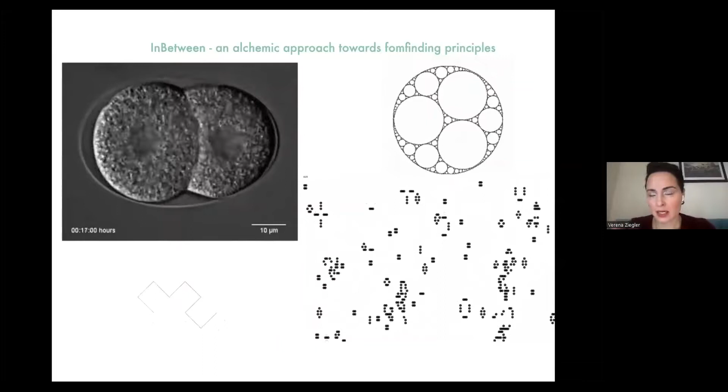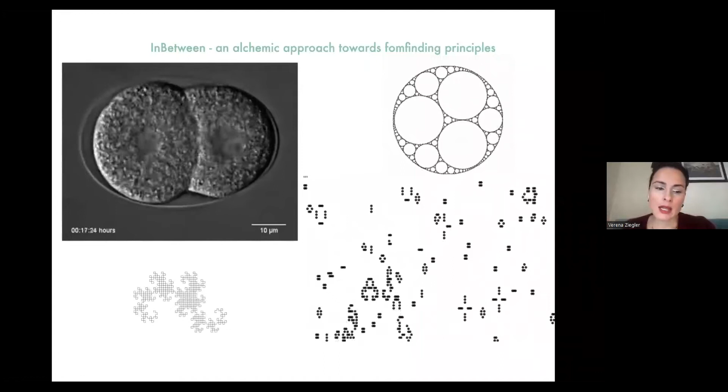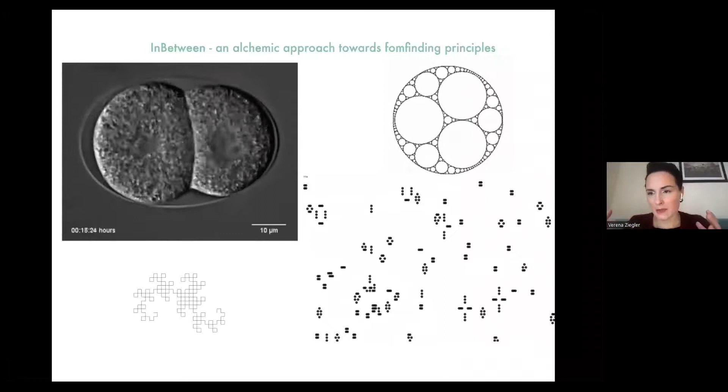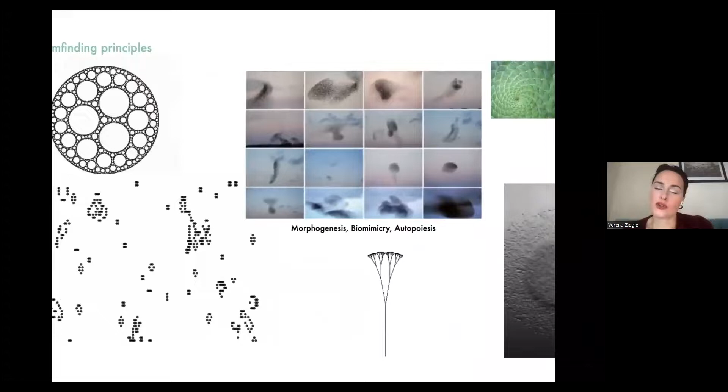So in my research, I try to look also at nature—at the basic elements of nature, how they work. Here on the left side you can see cells, from a baby who is evolving. You can see that these cells all work together in a community, in a collective, transforming with each other and building something together. This is also how algorithms work—they are not singular, they're always in a collective, reacting and interacting with each other to form something as a whole. Looking at those natural principles, you can find them in swarm behavior, in plants, and also in mathematics—I guess it's the basic principle of every living being.

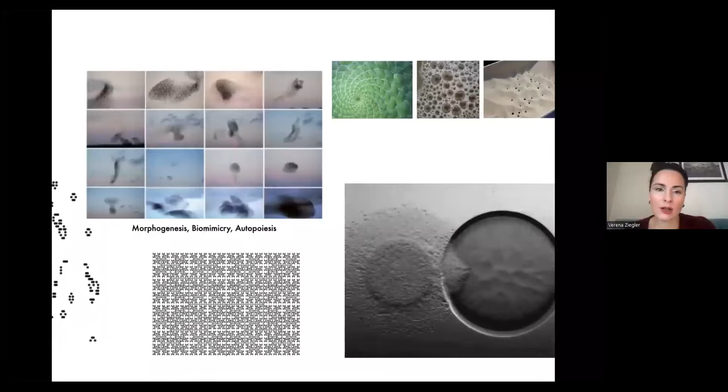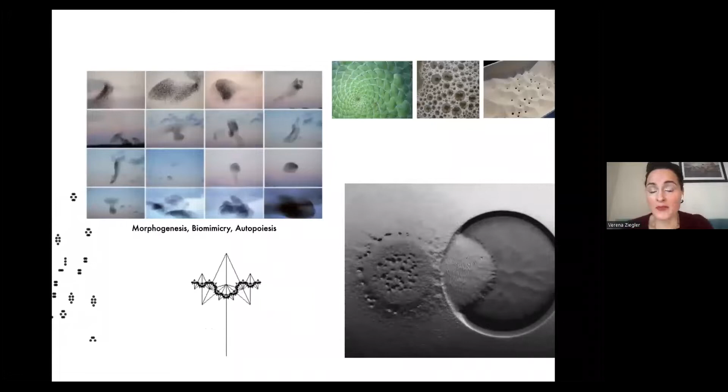Because when we think about it, we are all coming from the same substances, right? When we really break it down to a molecular level, we are all built out of the same substances—whether we are a plant, a human, or an animal. So keeping this in mind is the basis of my research.

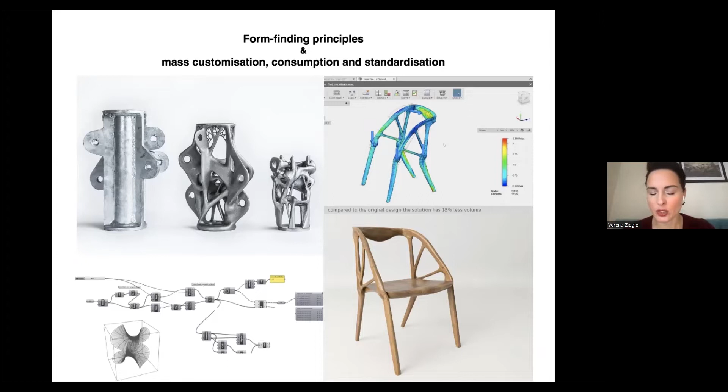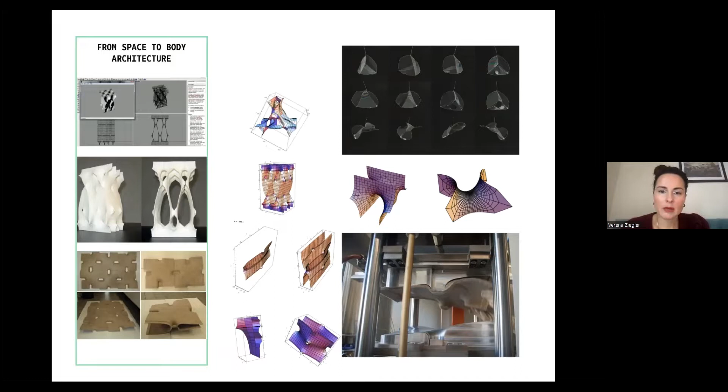I was experimenting first with soap bubbles, building different framings with wire, and then looking at what forms would evolve from that. I then continued to put it into Rhino, Grasshopper, 3D programs, and worked together with mathematicians who construct those minimal surface structures and use them in a designerly way. What you can see on the left — maybe I'll come to that in the next picture. I do.

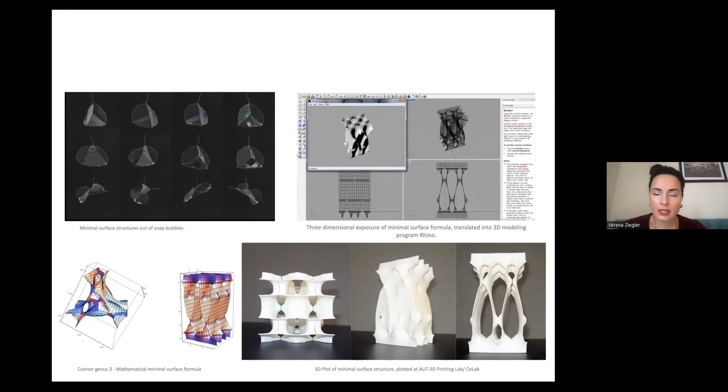What I did out of those mathematical formulas is that I 3D printed them. And I tried to use those structures to think of different wall systems, because I was coming from architecture. So wall systems that could stand by themselves, that you could mount and demount, that you can modularly build together, and construct interior walls with it.

I tried a lot of different forms, and I finally found a form that was kind of more easy to produce. This form was kind of that, where you could put just one element on an existing wall that would be sound bearing, and also have a kind of heat insulation and also a mold insulation.

Because at that time I was living in New Zealand, and New Zealand has the second highest asthma rate worldwide. That is because of the Pacific climate, but also because their houses are built very fundamentally or basic, I would say, without any insulation systems, or at least the old houses. Now of course in the new houses they have these things. But the poorer regions where also a lot of not so well-educated people are living in New Zealand, they

are really struggling with getting their houses dry. And therefore I was thinking of a very cheap and easy to produce modular system they could attach to already existing walls, or where with two elements they can also form new walls and put insulation inside of it, and electricity and things like that.

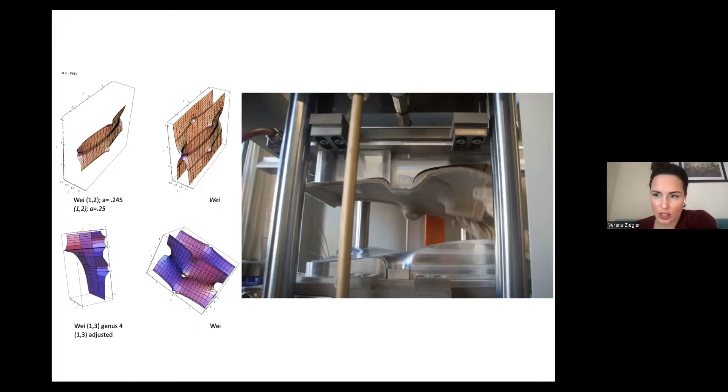And what I showed in this picture here is I used a heat compressing system you usually use in the car industry to do these interiors that are very thin from the material. And I used an epoxy, a sustainable epoxy resin, to then in this heat compression procedure produce those lightweight elements. Yeah, that was one thing I did.

And I was then more curious how we can think even more extremely about natural principles and how we could engage with them.

A long time ago, we started the Wunderkammer Lab. I don't know if you know the term Wunderkammer, but it was associated with a time when there was no distinction between the different sciences and disciplines, in the medieval ages, when people had these curiosity cabinets of things they couldn't really distinguish or put into categories, like sea monsters or different forms of shells.

And so we were influenced by that when we built our workshop. What we did is build a kind of new curiosity cabinet where we had a lot of different materials, a lot of different techniques, I would say, and substances. And we experimented very freely with matter, with materials.

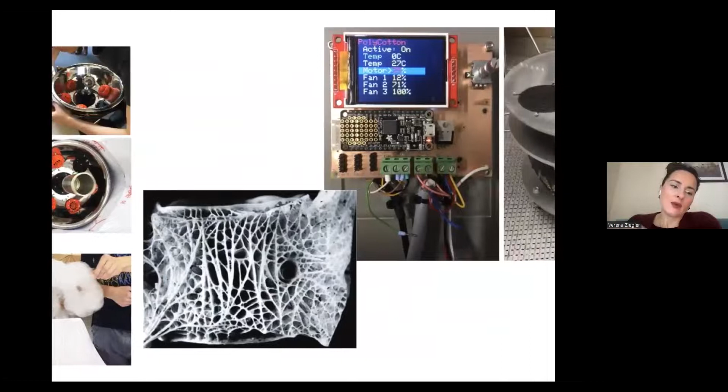So I found a student in the mechanical engineering department who built a candy cotton, or plastic cotton, machine with me. We did a lot of experiments, which were also - I still have burn marks from them, I guess, from the plastic that is getting melted. We did a lot of experiments with pans where we put holes in, where we then put hot plastic in it.

We ended up building a very professional machine, I would say - our poly cotton candy machine, where we had the possibility to create a kind of new lightweight material similar to the bone structure. It has a lot of weight-bearing function, but it is also very stable, and you can compress it into different forms.

It always depends on the form, like the different ways you press it through, similar to the candy floss machine - you have different sets of filters where you can put the material through, and it depends on that how the final form will look like. We did that with this machine as well.

Then I had the possibility to make another project, and I thought it's kind of interesting that those 3D printers are usually limited to, I don't know, 40 by 40 centimeters or 60 by 60 centimeters. And then there is a huge gap, and then you have these big professional 3D printing machines that fill rooms and take days.

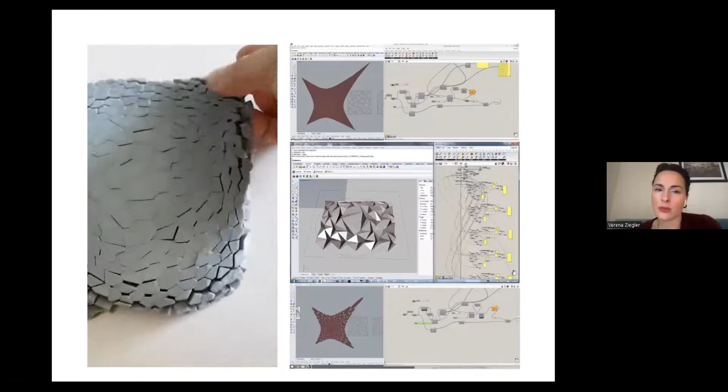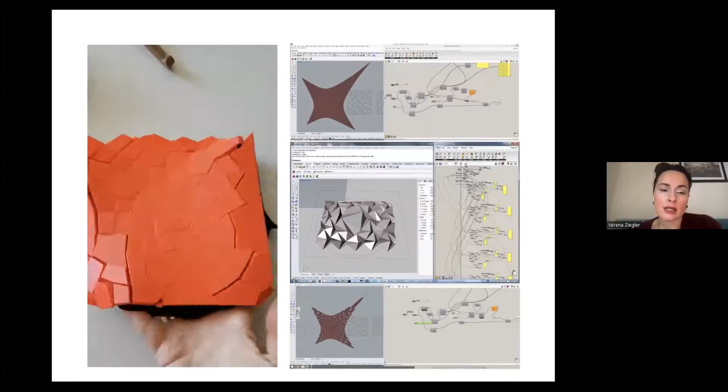But I needed to do more research to predict the form before printing. So I tried to do that with Rhino and Grasshopper, programs from architecture. It was difficult for me to predict forms based on those computational methods. It was very interesting what I found out, and I'm glad I did it this way, but I knew I couldn't get further with that.

So I then did my last project together with the computational design department. I first started off doing mathematical minimal surface structures, and I realized mathematics is great, but I also need computer scientists to help me, because it's not mathematics alone - I need machine learning for it.

I then did my last project description for students, and I had this team project where I was asking for a simulation to simulate how fabric in combination with 3D print filament would behave beforehand. I found a group at this university that was very interested, and they helped me a lot to progress with that.

Together with me, they constructed a program where you can simulate, once you print material, how it would interact in 3D and behave differently. Based on that, we developed a simulation program to test how 3D printing would work, and how you would arrange the filament on the fabric to create different forms.

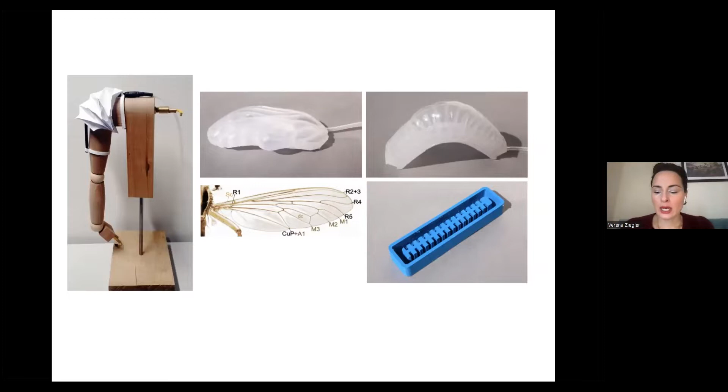We then found out that the material we want to use is a combination with coffee ground, because coffee ground has a bigger surface area relative to its weight. So once you suck the air out of coffee ground, it connects with itself in a very strong way and becomes very stable. Once you push air back into it, it's floating freely again.

So what we did in the end is fill silicone tubes with coffee ground, and put a little tube in it which sucks the air out and in, depending on whether the person wants to raise the arm or not. So the material feels soft and warm, like silicone does. Once you want to strengthen the arm, it then behaves like a muscle, lifting the arm with you.

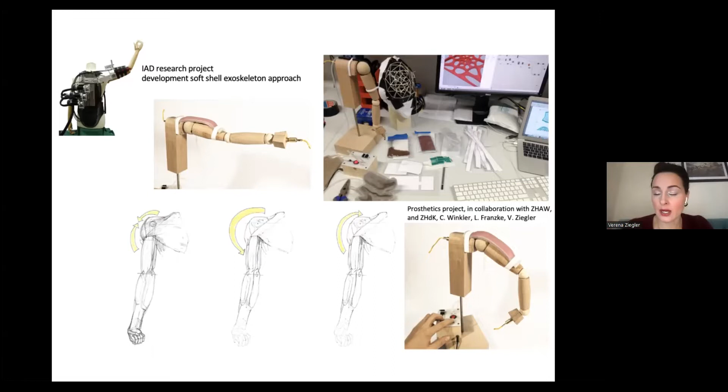What I also want to say as the last step is, as you can see, I slowly moved on from architecture to more bodily approaches. And I was interested in how we could interact, not just with architecture, but between the built world and the human body.

So I did research with a friend, Alicia Velasquez, where we did very low-fi prototyping, experimenting how we could differently interact with the world with our body, and how we could be more humanly or bodily based in interacting with our environment. We wanted this bodily perspective to the world, and it shifted my perspective, I recognized I'm no longer so interested in architecture, but more interested in how we interact with the environment with our body. We did a lot of weird experiments with form-finding principles, with clay, and kinetic sand, and 3D printed forms. But out of that sprang what is now my business today.

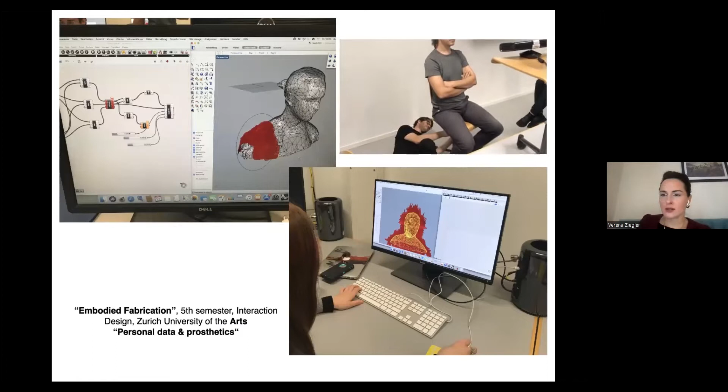I have to look what time it is. Am I still in time? Yes? Okay, good.

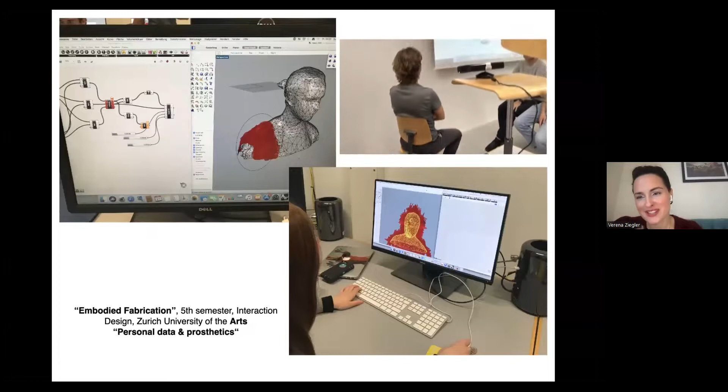So what I did with my students is that I 3D scanned them with a Kinect, and we thought about the prosthetics approach of thinking from the body to the environment. I used an architectural program to do something very related to the body, and we experimented with it. Then I started my project, inspired by that course.

And I researched how fashion actually evolved over the last 160 years. I found out that fashion, in the very basic sense, like sewing patterns, hasn't evolved at all. We are still in the same process as 160 years ago, when in the first industrial revolution a sewing pattern got standardized for mass production. I realized there's something really wrong with that, because the human body is 3D and not 2D, so there's one dimension missing.

And I found out that the fashion industry is the second highest polluter worldwide, because, as you probably know, a lot of clothes get produced in standard sizes and then produced in advance, and the stuff that doesn't sell sits on shelves and gets sent back. It usually gets destroyed, because it's cheaper to destroy it than to resell it.

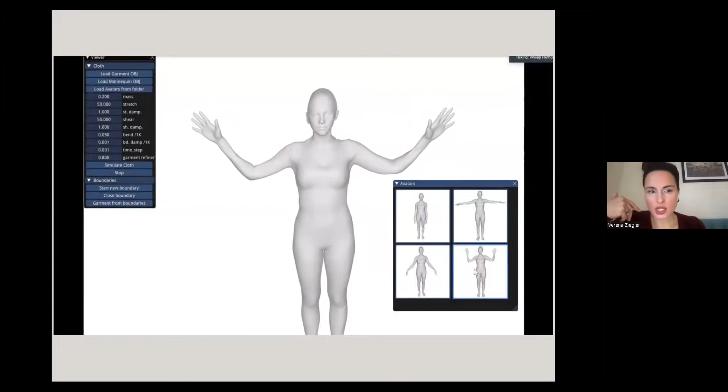Then—this is my daughter—we scanned different people, and with machine learning and this trained model we developed a system that could, from a static 3D scan, generate movement on an avatar. With this movement simulation and the material clusters in our library, we could directly create garment shapes on the body.

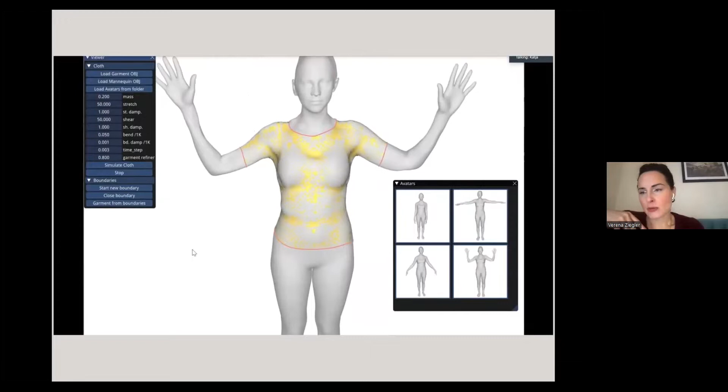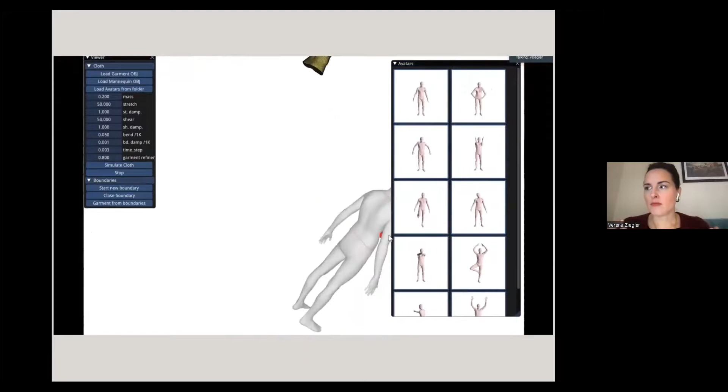What I found eye-opening is that a static position of a 3D scan doesn't represent how you move in a piece. This movement-based sewing pattern design isn't explored worldwide yet. With this program we could first see how, with different movements—raising your arm, lifting your shoulder—different needs of the fabric would evolve. We experimented with that a lot, and then I realized this, and I also wrote a patent about it.

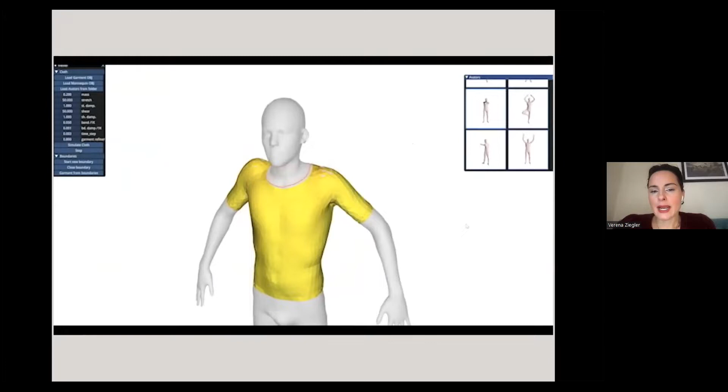Then I realized, okay, the fashion industry, they are not there yet. They are still stuck in, like, 150 years back in time. And they don't have this thinking that they want to produce better. They just want to have less returns, and they just want to have more profit.

That's it. So for the business model I developed, I used the 3D scanning technology we created, where you can scan yourself with every device, like tablets, laptop, smartphone, desktop. You just stand in front of your camera and turn 360 degrees in an A position, with your arms a bit stretched. Then we create an avatar from you, and a size recommendation for online shops.

That was the first thing we tried to enter the market with, to take people where they are at the moment and help them fix their first problem, the high return quotes. But then also show them, through data from the 3D scans, hey, you have a customer clientele who is scanning themselves and they don't really fit into these standard S to XL sizes. It would be great if you either have a size in between, or change your size systems, or develop a kind of capsule collection that's producible on-demand locally, for customers with different body shapes, because only 30% of the population fit into standard sizes.

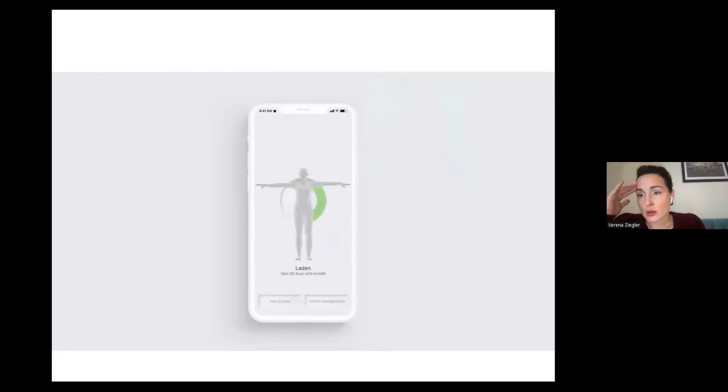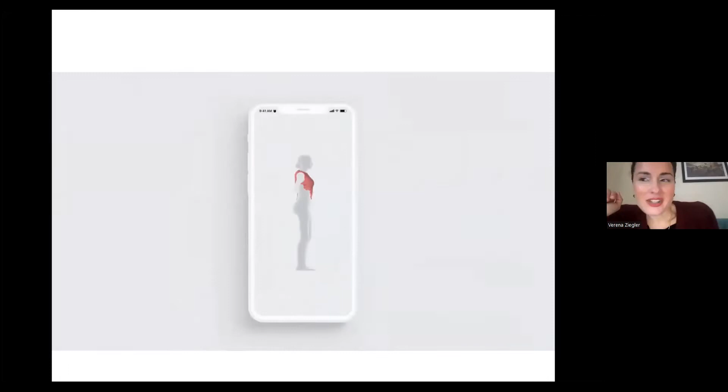I'm not sure if you are aware, but there are new rules coming, at least in Europe, by 2025, where they have to track CO2 emissions, and also track material waste and things like that. So the industry is really desperately looking now, for the first time, to get more sustainable, because before there was no rule forcing them. It's funny that they haven't made a big effort so far, because they weren't forced to do it.

So what we also realized, through the war in Ukraine and through COVID, is that those supply chains - to get stuff produced in Bangladesh and wherever, and shipped to Europe - were very broken down at a certain time. And companies started to rethink: oh, okay, wow, we don't have any resources in Europe anymore to produce, and we don't have the infrastructure. We are completely dependent. It's the same with energy, too.

So they are now starting to shift their thinking, to also have these kind of backup microfactories in their own backyards, where if mass production stuff is unavailable, they can start producing clothes themselves locally. I guess it's an interesting movement at the moment.

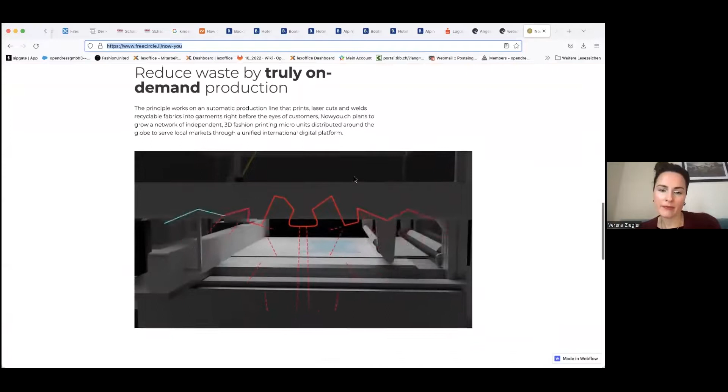Got it, yeah. It's really funny because there you can see that it's important to have different sewing patterns that are more like in one piece. So it's also creating different structures, maybe how we design things in a certain way. But yeah, that's just a kind of future vision.